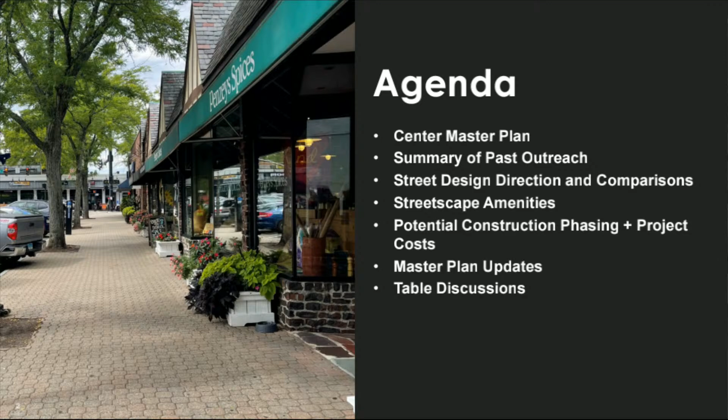Of course, we'll give direction on the street design with some comparisons, to give you an understanding of where we're heading with this project. We'll discuss streetscape amenities included in the design, and an issue we heard a lot about from merchants in the center: how the construction will unfold. We touched on this at our last meeting and want to give an update on potential construction phasing and project costs. We'll also cover master plan updates, and as Rick mentioned, we'll have a table discussion with plenty of opportunity to ask questions. With that, I'll turn it over to Liza Cohen from Stantec.

Thank you. Hi everyone. So when we first started looking at the center, we looked at it as a whole and tried to develop an infrastructure master plan, and this is part of the reason why.

The conditions today are somewhat deteriorating. As you can see in some of these images, there's patching, sidewalks getting torn up, sidewalks that are obstructed, and paving needs. Many lighting and electrical components are at the end of their useful life. That was the purpose behind this project, and the goal is always to develop a comprehensive vision for the whole center.

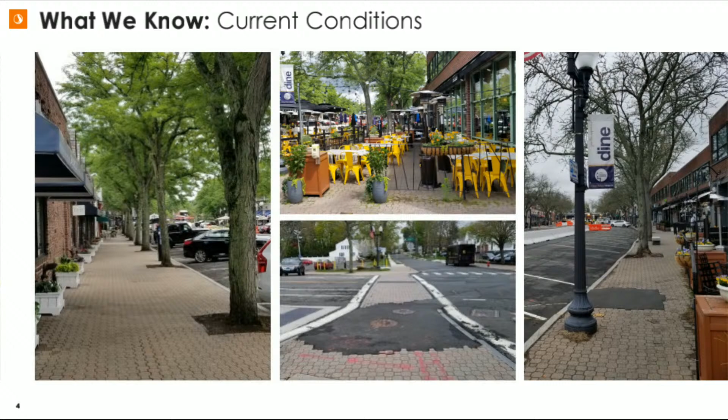At a glance, both LaSalle and Farmington have beautiful tree canopies, but if you look closer, you can see some signs of tree stress and decline. For example, the tree on the right-hand side here, you can see at the top things looking a bit twiggier than they should, and some roots are in decline because there's not enough soil volume out there today.

Part of our analysis also included looking at different mobility systems—how people walk, bike, and drive through the area. One important component of that is the parking system.

We counted over 5,000 spaces in the center as a whole. This parking utilization map is basically a heat map showing that several spaces or areas are oversubscribed, so you might drive up and not find a space, but in reality there's a space right around the corner. We want to think about why that is and how we might direct people to those open spaces to get more people into the center.

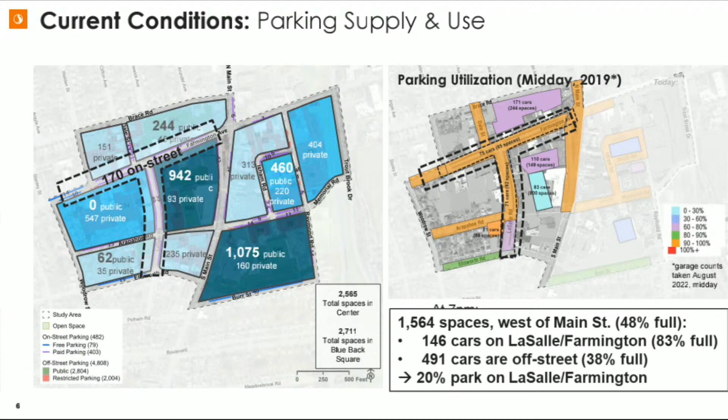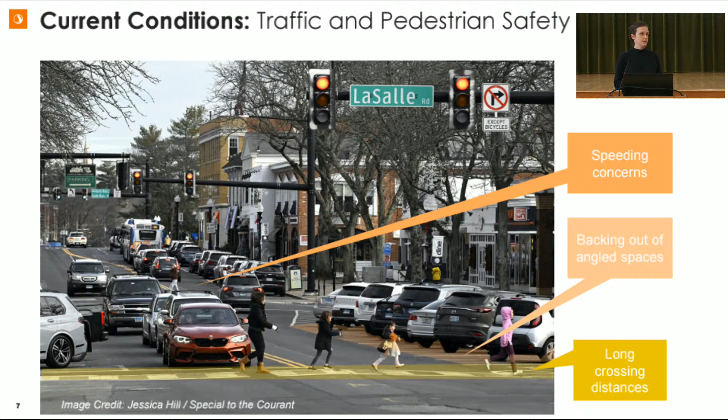We also heard a lot of concerns and documented some regarding safety in the center—things like speeding, excessive speeds, and backing out of angled parking spaces. We know angled parking inherently tends to cause more crashes than parallel parking, but there are also long crossing distances, meaning kids trying to cross several travel lanes are more exposed for longer. These are some of the things we looked to rectify with the updated design.

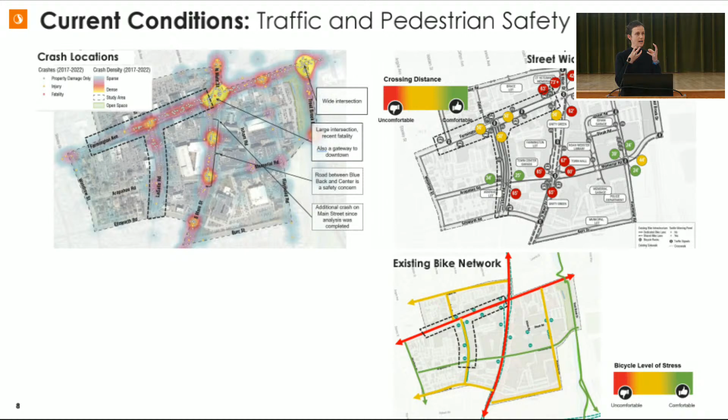Our analysis wasn't just talking with folks—we also looked at the data. These maps are examples. The heat map on the top left shows crash locations; where things look hotter, that's where there are more crashes. It correlates fairly well with the map on the right showing crossing distances—where there are longer crossing distances, there tend to be more crashes. We also looked at things like the bicycle network, where there are planters and trees, and the opposite, where there are gaps in those systems.

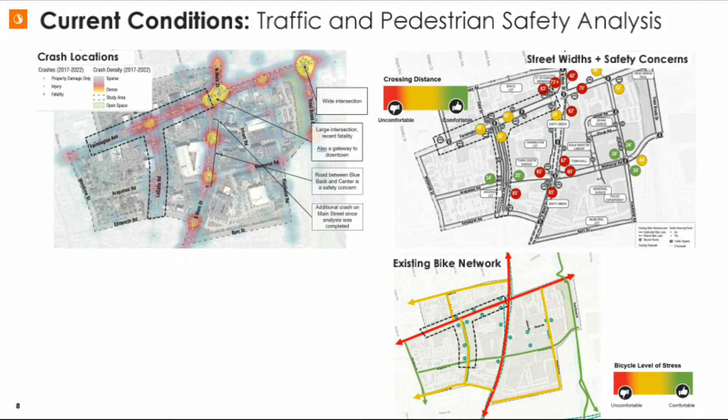As important as data and analysis is hearing from all of you. So how many of you attended a meeting, participated online, or looked at any of these materials before? Okay, so most folks in the room—that's great.

I'll walk through this relatively quickly, but it's been a long process, so it's worth reminding us where we came from. We're on public meeting number 5. When we were here in the fall of 2022, we were asking what you'd like to see on these streets that comprise the center, and in particular your thoughts on LaSalle and Farmington. We heard some contradicting things—LaSalle Road is a really good example.

Some folks said close it completely. Others said keep it one way, keep the parking the way it is. At the time it was one way, and everything in between. So there's a lot of different opinions in town, that's no surprise to anyone here, I'm sure.

When we came back for round 2, which was in the winter of 2023, at that time we heard general support for the concept we had for Farmington, less so on LaSalle. There were still a lot of folks who would like to see a reduction in parking, integration of more sidewalk or bicycle facilities there, or even still considering a full closure.

For round 3, we came back with another design that we thought targeted some of these issues that we'd identified and responded to community concerns. As Rick mentioned, we met with several business stakeholders, and that's where some of these concerns started to bubble to the top regarding loss of on-street parking, how the construction would be phased, issues related to loading zones, so a lot of things that help make these businesses tick.

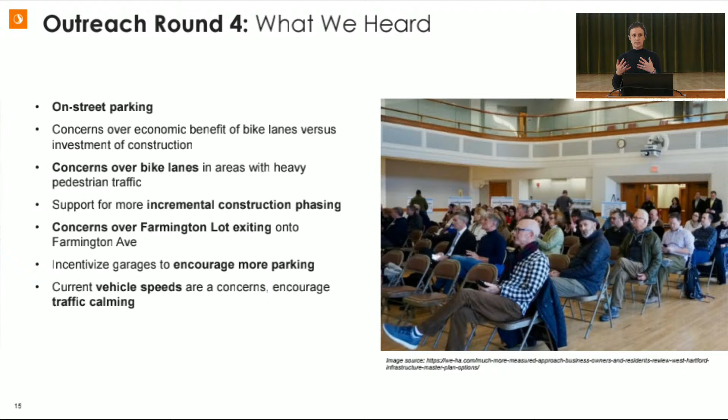So in addition to talking with people, we did this survey and asked, hey, what would you think is most important to prioritize in these concept designs? You can see the results on the screen here. In blue, yellow, and purple are outdoor dining, pedestrian amenities, and trees and landscaping. And so those are all kind of sidewalk-type amenities.

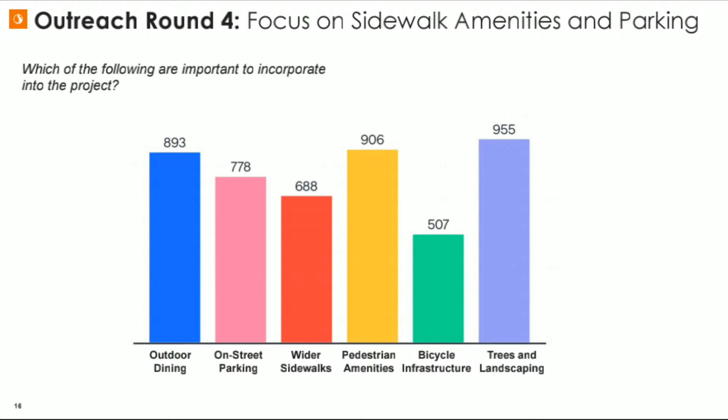So we were thinking, okay, how can we expand the space to accommodate these types of things? And you start to see bicycle infrastructure drop off. On-street parking, of course, is also up there in the pink bar.

We also asked, between the concept options we had at that time, what folks would prefer to see. These are a little challenging to read, but they're street cross sections. So if you're standing in the middle of the street, what's on the street? You can see the gray area is right-of-way for driving cars, the blue area for parking cars, the yellow areas are landscaping, purple for outdoor dining, and orange for a clear walkway.

So our different options essentially boiled down to, this is for Farmington: Option A had parallel parking, space for a bicycle facility, as well as space for some other things on the street. Option B was essentially status quo, angled parking. Option C was a mix of both. Option D had in-street bike lanes.

And so when we asked folks to vote on this, and you can look at these results in more detail online, the vote was pretty much split between A and B, so parallel parking or keeping the angled parking and all the amenities that can fit once you make that decision. But what's interesting is the second choice on the bottom right there. So when we said, okay, if you can't have your first choice, what would you pick? There, option C rose to the top, which is kind of this hybrid option.

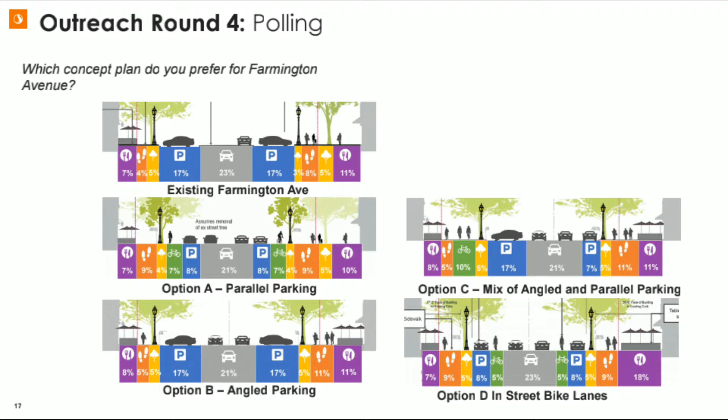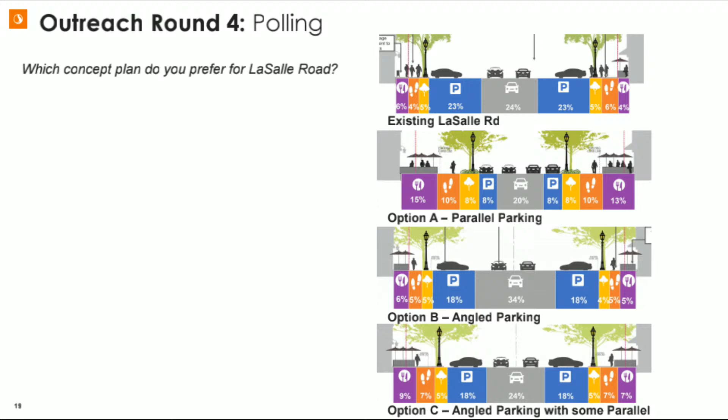Similarly, some similar looking cross sections for LaSalle Road: parallel parking, option A; angled parking, option B; and then this kind of hybrid, angled parking in some spaces, parallel in others, for option C. Again, the poll results came back split down the middle pretty close, with option A being the top choice, parallel parking. But when we asked what folks would like to see as a second option, option C bubbled to the top. So with that, I'll turn it over to Travis, who will talk about how we took the design.

Travis Ewan from Stantec. I'm the project manager and landscape architect.

So we're going to take a look first at LaSalle Road and see what the design direction is there. For the most part, it's very similar to what is out there today. We have angled parking, maintaining mostly angled parking, with some select areas of parallel parking to allow for loading.

We heard from business owners that loading and deliveries was a concern, so having space for trucks and Uber Eats to utilize some easily accessible areas that would be time-restricted. So maybe in the morning they're loading delivery zones, and then in the evening they open up to parallel parking. So there's that flexibility there.

With the LaSalle Road design, we've expanded the sidewalks by 5 feet, which makes for a more generous walking surface. Having these clear areas between outdoor dining, street tree planting, and parked cars really makes for a better pedestrian experience. We're also creating some raised crosswalks, mid-block crossings, as a traffic calming measure, to slow traffic down and provide ADA accessibility across the roadway, making it easier for folks to traverse the center.

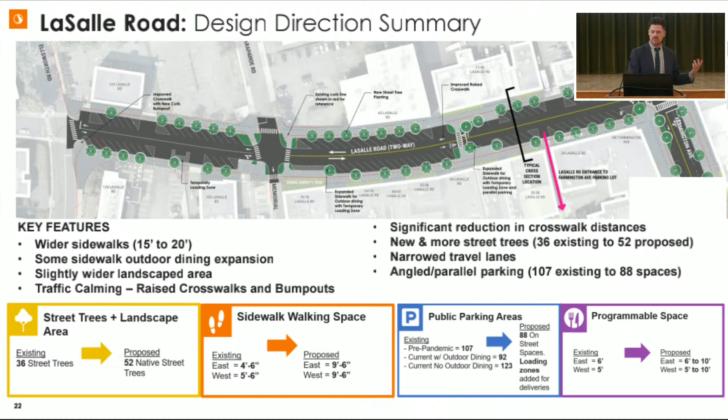Stormwater is a big issue to us as well, being able to treat stormwater before it goes into a pipe and getting it back into the ground. So that's all kind of baked into our design thinking.

Getting into some scale comparisons between option A, option B, and what the direction is today: in option A, we had a 10-foot clear walking zone on LaSalle. Option B ranged from what it is today, roughly 5.5 feet on either side with some variation. With the new direction, we're maintaining about 9 feet 6 inches clear.

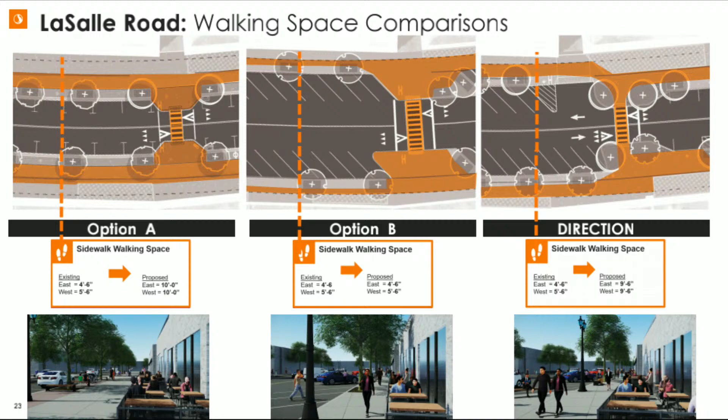You can see some images of what that might look like there. We also have some images in the back that you can see afterwards.

We did some comparisons to what we're calling programmable space, in this case outdoor dining. In option A, we were really able to gain a lot of outdoor dining space. Option B is pretty much status quo, what it is against the buildings, keeping the dining space between the private right-of-way and the public right-of-way line.

With the new direction, we have these opportunities in select areas to expand outdoor dining. By just gaining 5 feet on either side of the curb, it really promotes these opportunities to expand dining.

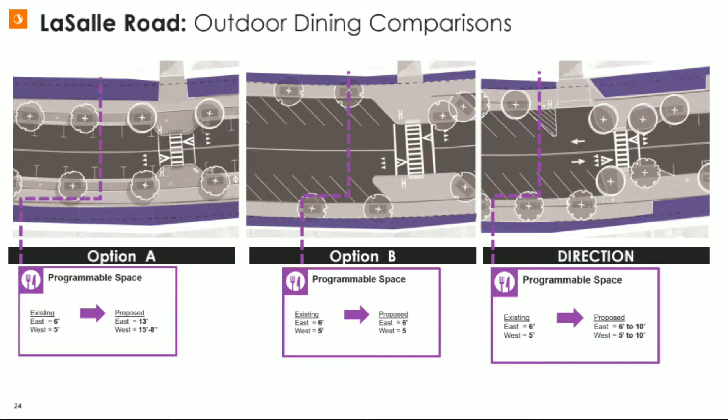On-street parking has been an important issue. In option A, we had the parallel option. In the pre-pandemic counts, there were 107 parking spaces on LaSalle. In the proposed option A, there would be 70, relying on what Liza was saying about parking elsewhere.

Option B, we were still wanting to make pedestrian improvements such as traffic calming measures and safer crossings, which would bring on-street parking to about 88 spaces. With the new direction, we're right around 91 with loading zones, depending on the time of day — it might go down to 88 with the time-restricted loading.

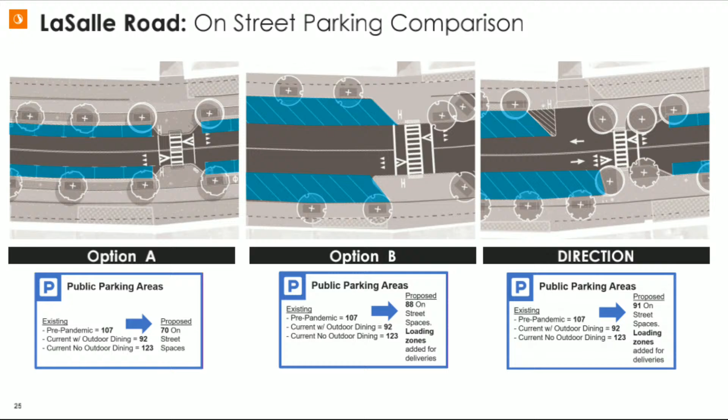As I touched on before, I won't go too much deeper, but really being able to improve the urban canopy, having a diversity of street tree plantings out there, and finding opportunities where we can introduce green infrastructure — natural ways to filter stormwater.

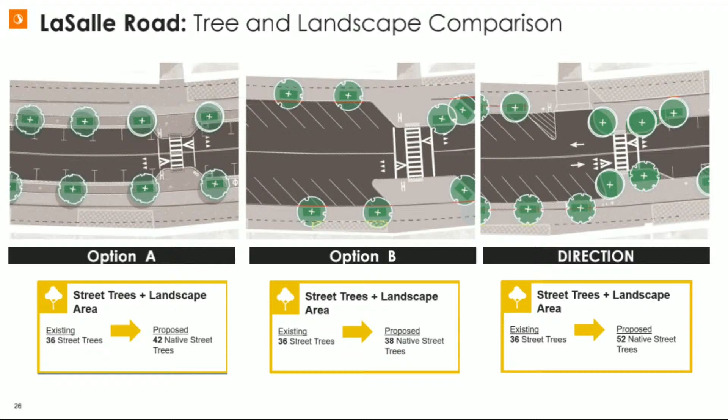Looking at Farmington Avenue, again very similar to what is out there today, except we're proposing this balance between angled parking and some parallel parking. On average, we're widening sidewalks by approximately 5 feet, which starts to balance out the south side of Farmington to the north side of Farmington. If you walk down there, you know the north side is a little bit more spatially restricted than the south side.

We're increasing parking from pre-pandemic levels to 78 spaces. And again, we have these traffic calming measures. The mid-block crossings will be raised, which will help slow traffic down, and will be flush crossings for people with mobility issues.

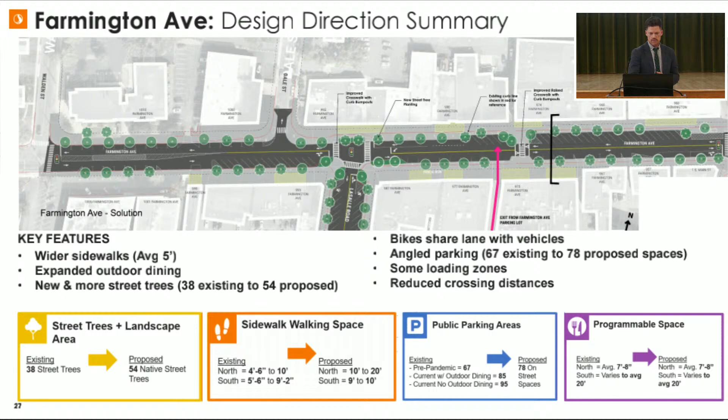We'll get into some comparisons, looking at spatial comparisons for Farmington Avenue. Currently, which is basically option B, there's a variation between 4.5 feet in the most pinched scenario, to around 10 feet where it opens up in some select areas.

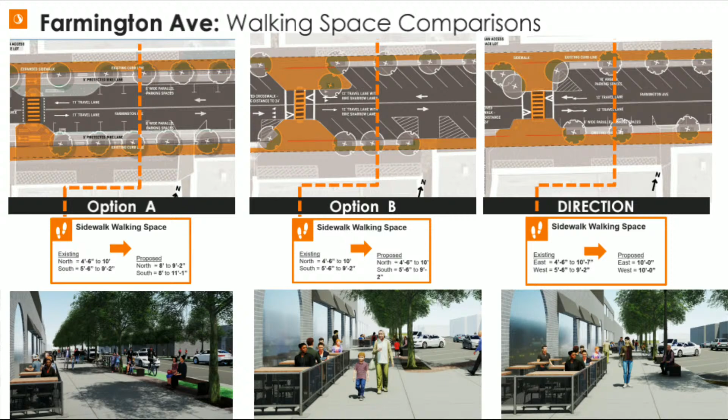For option A, we were originally showing a protected bike lane, but we were still able to expand that walking space by 5 feet, so average 10-foot clear walking space where people can walk side by side down the street.

Looking at the outdoor dining comparisons, it's more or less going to be what's out there today. We don't gain that much space by bumping out, so really keeping within that public-private right-of-way. If we were to stick with option B, there would be some pulling back of the outdoor dining in order to keep these clear areas.

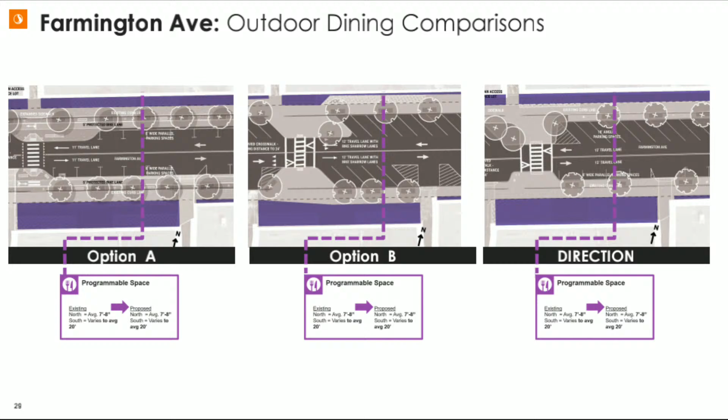For on-street parking, like I touched on, we're getting about 78 spots, but we're also getting the flexibility of having loading zones in there.

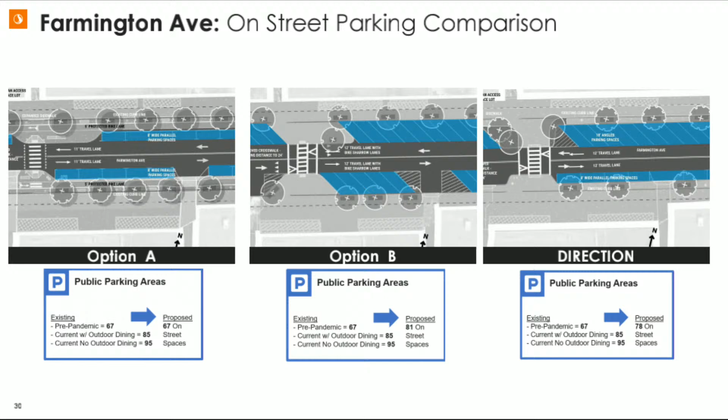For the tree comparison, in the proposed plan we're trying to achieve about 54 native street trees. Again, it's not packing them in, it's filling in the gaps that we know are out there today.

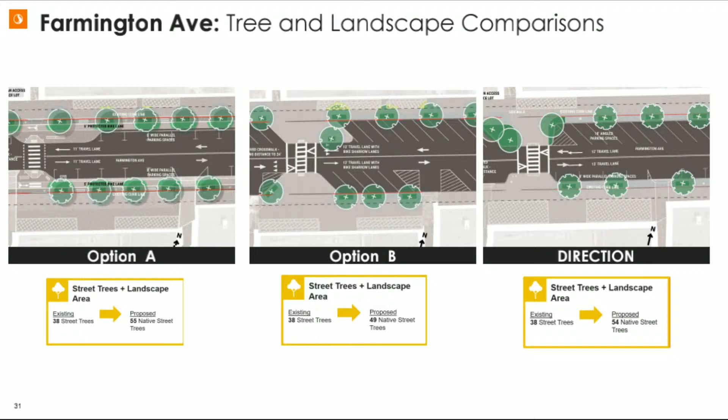As Liza touched on, the current pedestrian lighting is an issue. It's at the end of its useful lifespan, so this project is a really good chance to upgrade that infrastructure.

We're proposing a new innovative tree planting method called a soil cell system. It provides a lot more soil volume than what's out there today in a typical street tree planting, so it allows these trees to get really big really quickly. For concerns about viewing to the retail businesses, allowing those trees to get big in a short amount of time really opens up those view sheds.

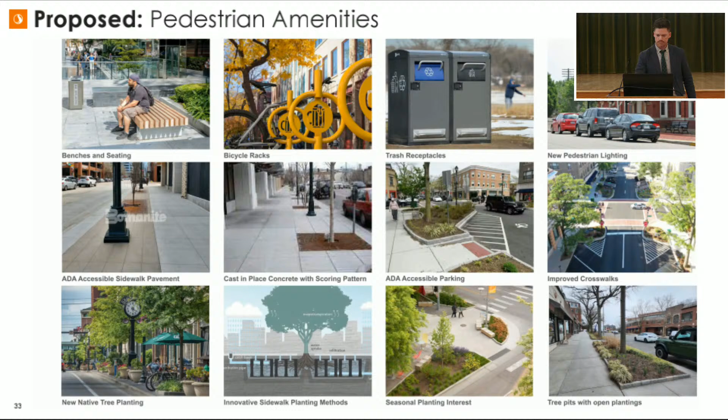Then construction phasing, getting into more granular detail. We see this really happening in multiple phases to have the least impact to businesses, taking a granular approach we're calling a block-by-block approach.

We're thinking of LaSalle in, let's say, 2 phases, but within each one of those phases there would be 3 sub-phases. We would start on one end of the street and the construction would happen in a linear fashion, and once one section is done, that would open and then we'd move on to the next section - having the least impact as possible.

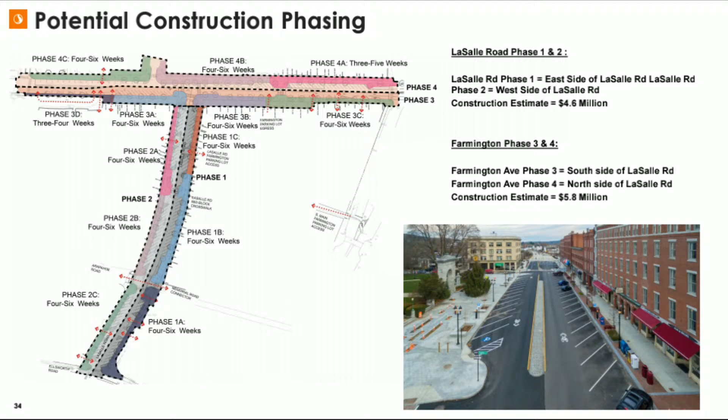On the next slide, I'll show you an example of how a subphase sequence of construction could work. Also looking at construction estimates: for LaSalle it's roughly $4.6 million, and Farmington is about $5.8 million.

Here we'll look at an example construction sequence so that it'll allow the contractor to work with business owners and keep business open. The first thing they would do is set up a staging area, utilizing the parking area just in front of that subphase as a staging area.

The parking area surrounding it would stay open, and two-way traffic would remain. There would also be a zone 5 feet off the face of the building that would be maintained for pedestrian access.

Then the existing pavement would be removed up into that public right-of-way line. Then new utilities would be installed, along with light pole footings and things of that nature.

And then the new pavement would be installed up to the temporary green line that you see there, so that we're still maintaining access. That would then be opened up to the general public, and utilizing after-hours work, the contractor would work to fill out construction up to the face of the building.

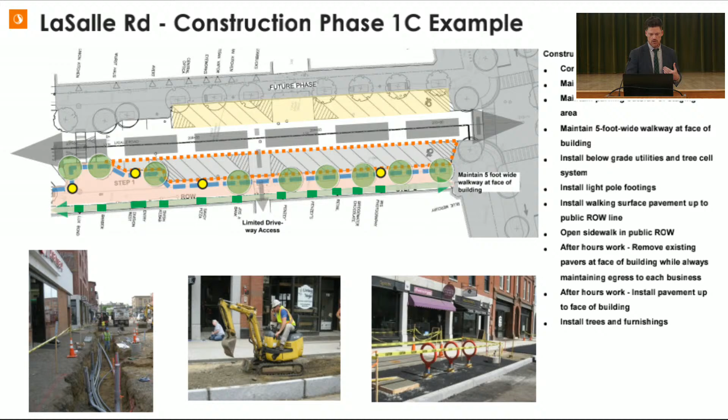And then trees and furnishings, things of that nature would be installed. Once all of those subphases were done, then the milling and repaving of LaSalle would happen.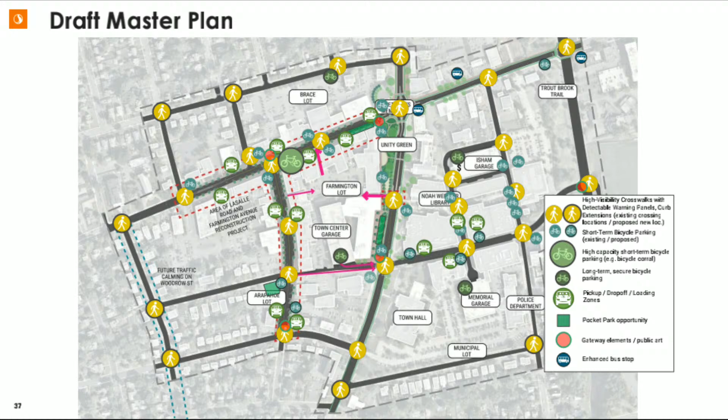So not to forget, this project is part of an overall master plan for the center. As I mentioned before, the analysis and community conversations revealed some gaps in what's happening in the center compared to your community goals. So we're looking at things like where can we improve crossings, not just in these projects but also in the future.

Where can we provide bicycle parking, both short and long term? Where are there opportunities for pocket parks, places to expand, places to gather, places for public art potentially worked in there, as well as gateway elements that sort of tell you, hey, you've arrived, you're somewhere, and it's special.

We're also looking at CT Transit service and how we can make the bus stops in downtown that much more successful. So overall, this is where we are with the master plan, and I'm going to turn it over to Dwayne to talk a little bit about some of the other complementary initiatives.

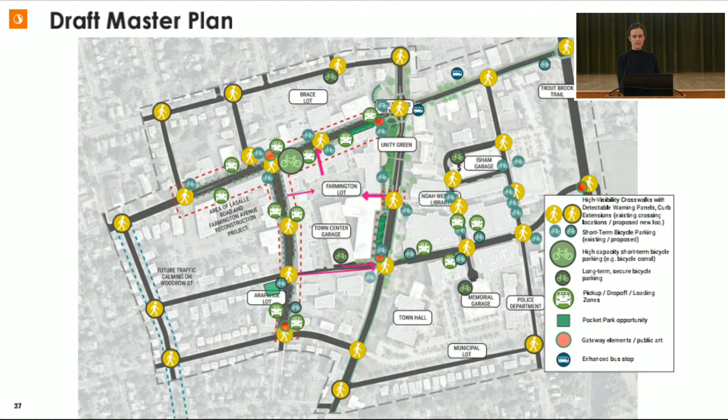So in addition to the West Hartford Center Infrastructure Master Plan, we have other projects that are going on that overlap or complement one another. So I just want to go through those quickly.

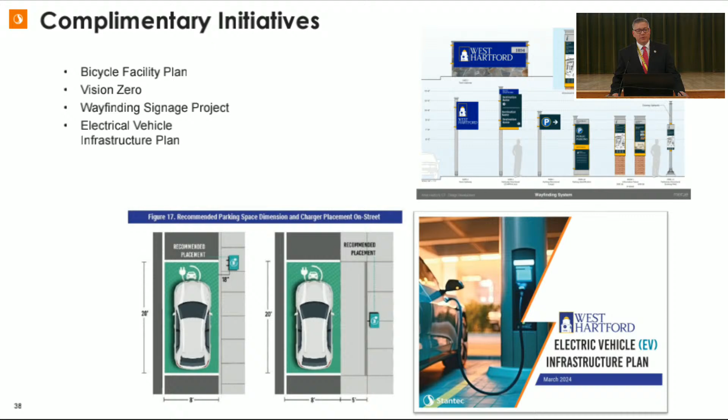One of those is our bicycle facility plan. We already have a bicycle facility plan, but we're updating it. We're looking at ways to get additional bicycle facilities in the town, have better connectivity through the town, and connectivity to other areas outside of West Hartford that have similar features.

So that's the bicycle facility plan. Vision Zero—you may have heard about Vision Zero. We recently adopted a Vision Zero plan, which is focusing on traffic safety throughout town. The goal of that is to eliminate fatal and severe injury crashes by 2033. We've already started working on some of the elements recommended from our Vision Zero action plan, and we've coordinated with our consultant for the Center Master Plan as it relates to traffic safety through Vision Zero.

Third project is a wayfinding signage project. This is something we're interested in doing throughout town as well, but there's wayfinding signage that could benefit the center. So our consultants have met and are working together to incorporate wayfinding signage in the center as part of our master plan project. On the top right of the screen, you can see examples of that signage.

And then lastly, the electric vehicle infrastructure plan is another ongoing effort, and obviously we want to incorporate what we can in the center for electric vehicle infrastructure.

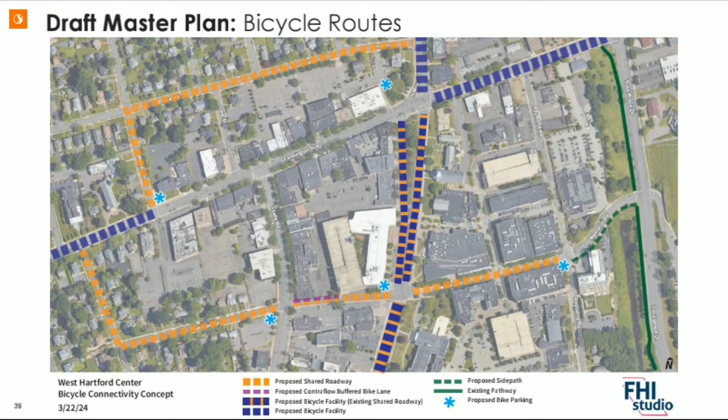So next steps—I just wanted to touch upon the schedule for the project. We've been working on this for quite some time, and the hope is to move forward with the design and take that to a bid phase later on this year.

We also are intending to hire a construction manager. It's a pretty complicated construction project in the center of West Hartford. So in order to get our best foot forward, we want to bring in another company that will help assist us with some of the construction issues we're more than likely going to encounter, especially working with area business owners and restaurateurs to make sure any issues can be ironed out in advance as best as possible.

It's a very involved construction project in a very busy area, so we want to do the best we can to work around any inconveniences, make sure deliveries and people have access to all the businesses and restaurants as best we can. So the goal is to get through the design, get prepared for construction, probably have another public meeting before construction starts to help coordinate. We also want to have the construction manager get in touch with all the businesses and answer any questions they may have and better prepare for the construction.

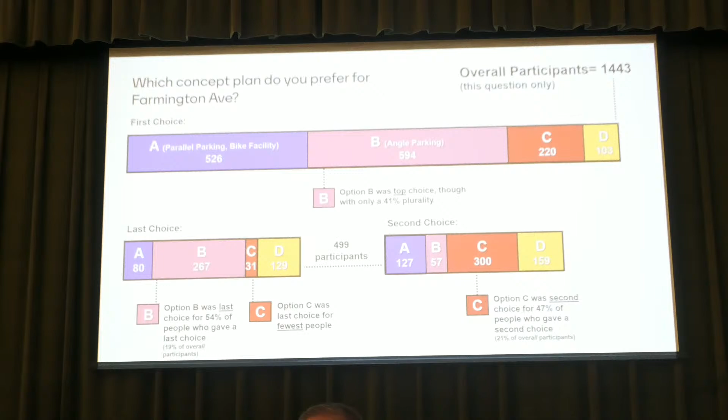I'll just say that we're really just trying to balance the feedback we're getting to really make it as rich of a plan as we can by expanding the sidewalks, making it a lot safer for pedestrians crossing the street.

This gentleman in the back.

I noticed in the overall master plan it showed the CT Transit stops. I was wondering if the town is hoping or planning on participating in the new Connecticut Department of Transportation Bus Shelter Enhancement Program to enhance those bus shelters within the center.

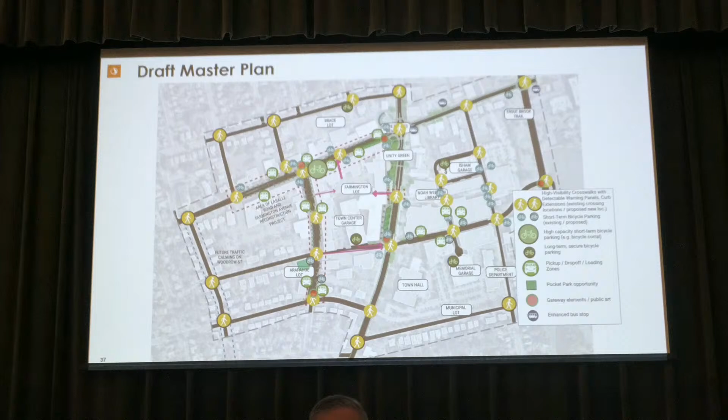So we've been coordinating with CT Transit on a lot of programs, and we will look into this opportunity. There are some really great shelters in the center. I don't know if we're adding shelters per se, but there may be opportunities that we can work out with them. Yeah, so enhancing the existing ones. I don't know if...

One other thing, going back to what the business owner here said at the jewelry store is, I don't care what hour you walk, whether I'm closing up my office or it's 7 o'clock or 9 o'clock or 11 o'clock, there's a minimal police presence downtown, considering the police department's right downtown. There's chaos going on, sometimes at 9 o'clock at night, and if everybody in town is witnessing it and saying why isn't anything being done, where people are smoking up their tires on Farmington Avenue in front of Arugula, or 5 motorcycles having a race down towards Treva, and everybody's witnessing it, but nothing ever changes. Every business owner I've talked to about the survey said they've asked for an increased police presence, especially since the police department is right downtown. I find it odd that it's not like the police department is 5 miles out, like some towns, like Middletown, where they have a big traveling area to go. Believe me, I love the police, I love what they do, they've been wonderful downtown, and when I see them, they've been helpful and everything, but I just don't understand, and I know they go where they're told to go. So I just don't understand why this business here is experiencing this every day.

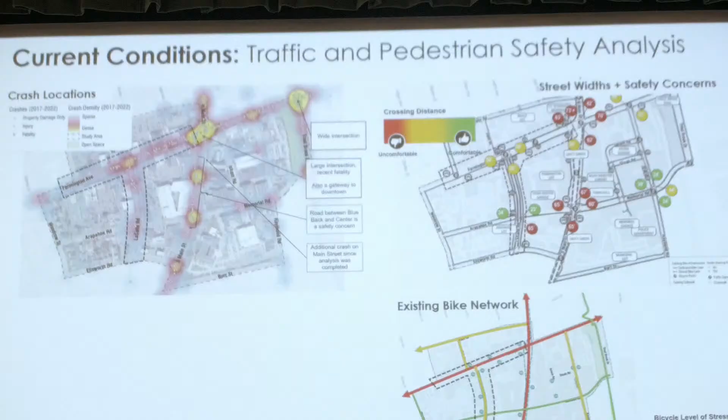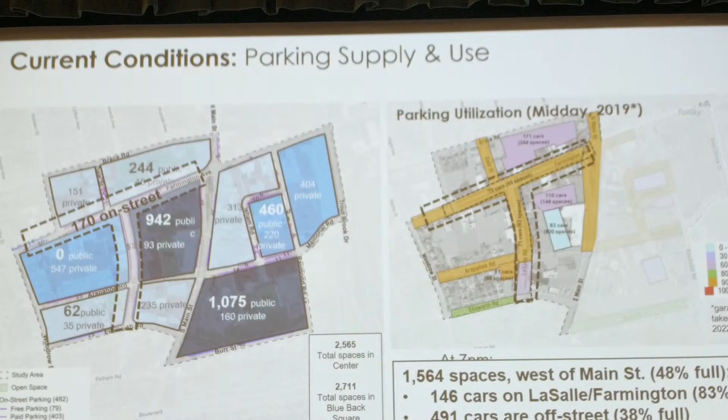I'm just trying to understand why take up valuable sidewalk space with these long planters if it's just aesthetics. It makes no sense to me.

Planter pit size is going to be 4 by 12, so not a huge area. But it needs maintenance. That's defining the... Right, it requires maintenance. And it helps with natural stormwater, low impact. Okay, all right, so there is an advantage there.

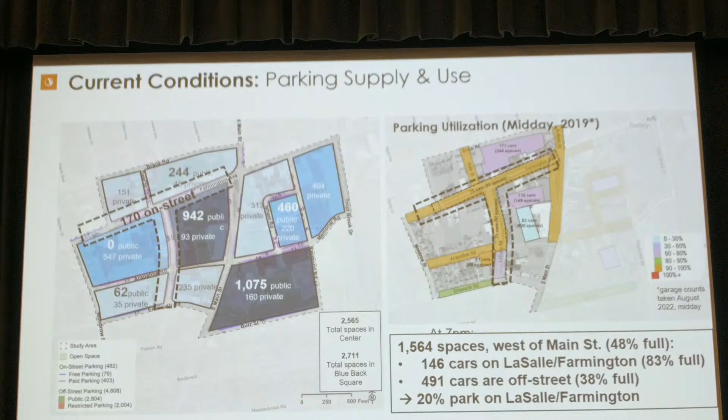But the town will pay for maintenance of all of that, correct? And will there be those large planters, big massive pot planters that I see around the center? Or no, those go away?

First question, answer to your question: fine details of exactly what's going to be implemented, how much needs to be implemented. There is a stormwater benefit, and it's one of the reasons.

Also, one of the issues that we have with the trees right now is there's sort of chokes in there, and so the roots are heaving out of the ground, which is creating a tripping hazard that we're trying to contend with. So we want to improve the tree wells.

And then those big planters go away? I assume they would go away. We haven't actually talked about it, but I'm just thinking of the cost to maintain all of this planting throughout the center seems enormous to me.

And I've never understood why we've paid to have the town maintain the big planter on the corner of North Main and Farmington. Why? Just for some pretty plants when it costs a lot. So that's my first question.

The second is, I still don't understand why we did a survey and then ignored it. Statement of question.

I have one last question. Where will the snow go?